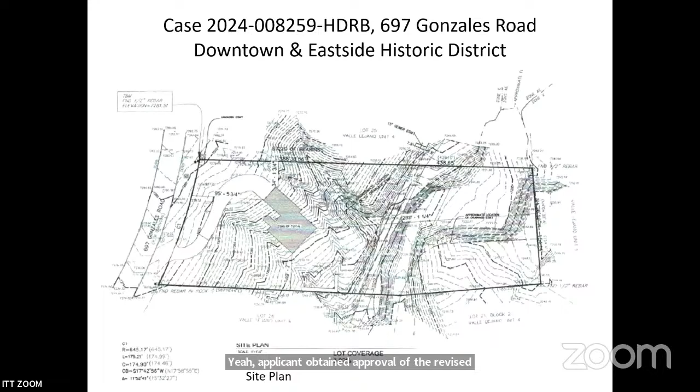The applicant is proposing to construct a 3,938 square foot residence to a height of 15 feet 6 inches in the front, where the maximum allowable height is 16 feet. The residence is designed in a Pueblo style.

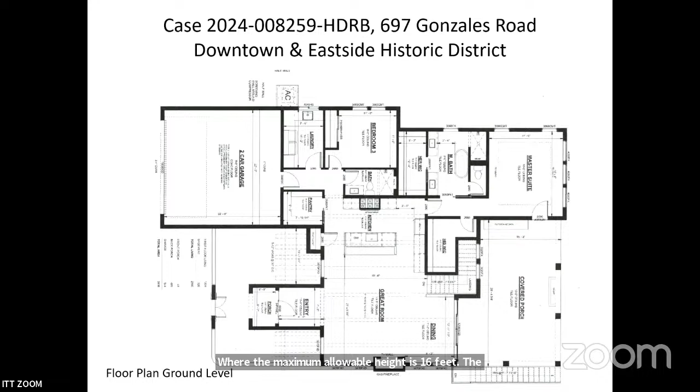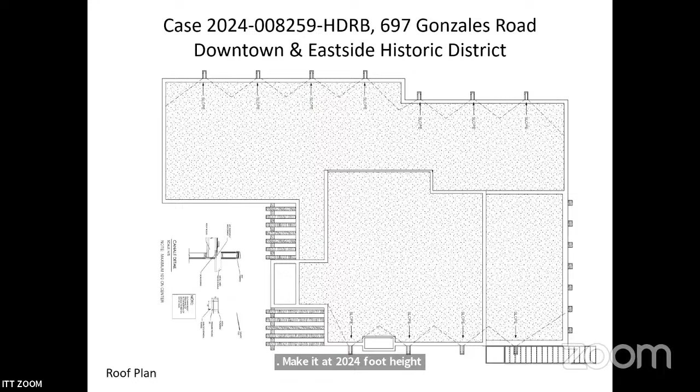This is our ground floor level. And then this is the lower floor in the back, which will make it a 24 foot height. And our roof plan.

On our west elevation, they're planning an arched entry gate with a stuccoed 4-foot garden wall, a covered 45 square foot portal over the entry door. Solid wooden entry door will be flanked by pergolas. The 2 pergolas, one at 73 square feet and the other at 56, will be constructed with 12-inch wood stained beams.

The windows will all be true divided light clad windows and have a 2-car garage with paneled wood door to the left end of the gated courtyard.

North elevation, it will have the AC compressor with a 3-foot pony wall to screen it. And then all of the windows again will be true divided light.

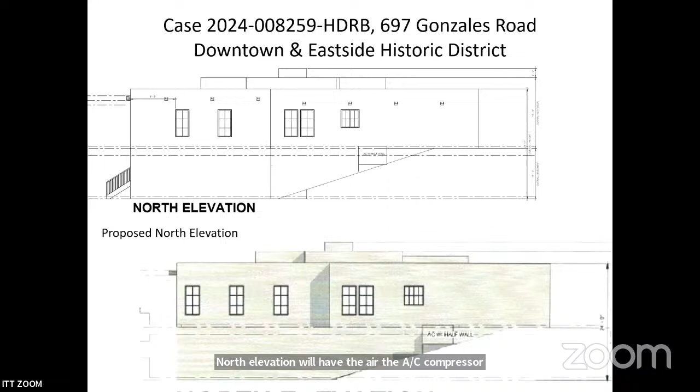The east elevation will show the 2 stories with the overall height of 24 feet. True divided light windows, sliding true divided light glass doors on the first floor with the basement, and portals with Viga wraps around the balcony with black wrought iron railing.

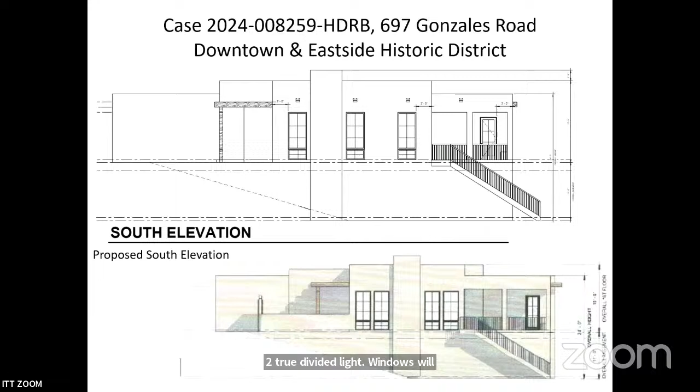The south elevation has stairs with a landing and a wraparound porch with black wrought iron handrails, a fireplace with chimney, 2 true divided light windows will flank the proposed fireplace, and 1 true divided light wood clad door at the southeast corner of the portal.

Their finishes will include El Rey cementitious in La Luz. The front door is going to be what's called Salty Dog. The courtyard gate will be Majorelle blue. The garage door will be walnut, and exterior windows and patio doors will be in dark bronze. The light fixtures, the Mesa Bear, will be located near the gate and the front door, and the Pueblo flanking the garage doors.

Staff recommends approval of the proposed project and finds the application complies with section 14-5.2D, general design standards for all historic districts, and 14-5.2E for downtown and east side design standards.

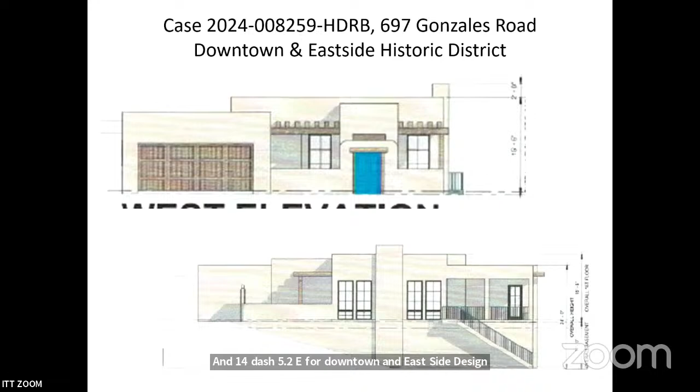Lanny, thank you for your report. Board members, any questions for Lanny at this time? Member Beachey. Thank you, Madam Chair.

Lanny, I have a question about the east facade. It's mostly windows. Is that compliant because they're under portals? Yes. And then secondly, what is the material the posts are made out of on the east facade? Are they concrete? The posts. Those are all wood. Great, thank you.

We're done with the questions. Applicant or applicants, please come forward and get sworn in.

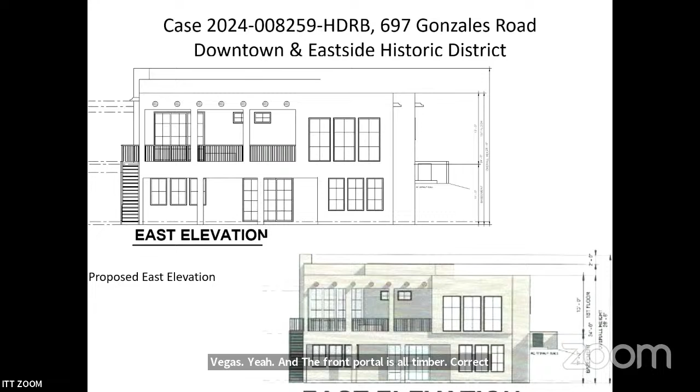I wanted to follow up on Member Beachey's question about the posts on the rear portals—those are stucco, right? The vertical ones are stucco, with vigas. And the front portal is all timber, correct. On the front elevation, is it also the case that the window to the left of the door has been eliminated? Yes.

Okay, thank you. Any other questions, board members? Member Benvenu. Thank you, Madam Chair.

I think you checked the boxes off on the style requirements, but some of it still feels, maybe because of the 2-story facades, a little stark and Adobe-like, which we're always trying to emulate in our district. One thing that could help is that the corners are all going to be bull-nosed, which I understood from the site visit today is in fact the case, correct?

And then what about the windows? Will they be deeply inset, which is also something that the code encourages? Yes. Okay, I think that'll help too, because especially on those large banks of windows to get some shadowing and modulation in those facades.

And then the door, is it wood? The garage door I'm talking about now. Actually, it was wood. Okay, wood clad. Okay, all right, thanks.

Thank you. The inset for the windows, how much inset will that be? I think it's 4 to 6 inches. 4 to 6 inches? Thank you.

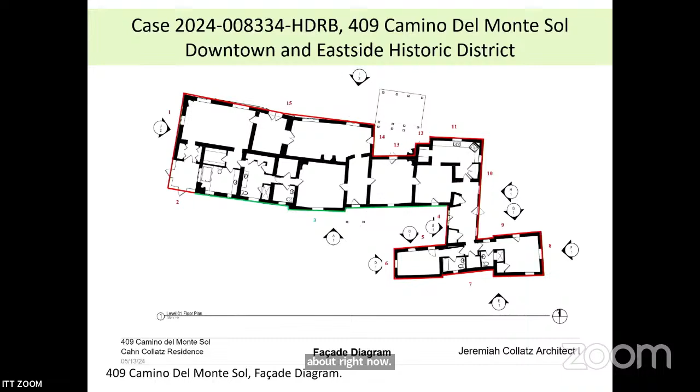Those things are up to the board, I think that's why we're here. We hear everyone's points of view, and we do an analysis of the situation, hearing the concrete evidence that is being presented to us. So it is up to the board to make the decision. With that being said, I will entertain a motion unless there's further discussion.

Member Beachlight? Thank you, Madam Chair. I'll make a motion for consideration in case number 2024-008334, HDRB at 409 Camino Del Monte Sol.

I move to designate the south facade number 3 as primary, which excludes the westmost portal already, and also the hyphen that connects the two buildings. So I'll recommend we designate facade number 3 as primary, excluding the portal that's non-historic, and also facades number 14 and 13 to capture the north inset portal, excluding the fireplace that's been added and the pergola that blocks the view from the north.

Second. Is there anything further to add? If not, roll call, please.